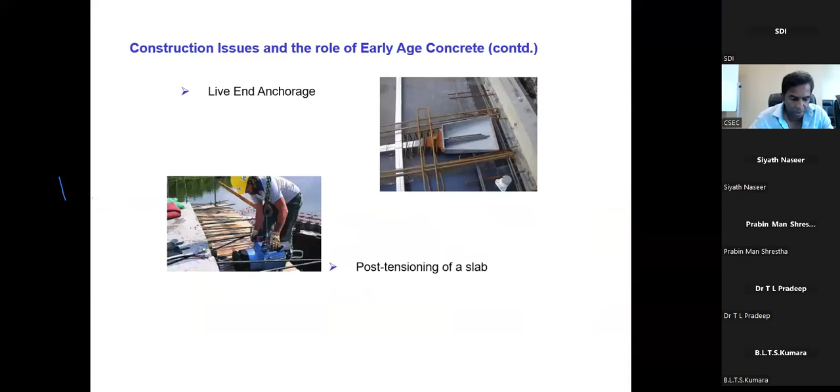Sorry, it automatically goes, but I want to spend a bit more time on those slides. So I'll just take over. Sorry. Let me correct it. Sorry about that. I think it should go backwards. Let's go to the top of the presentation. I'm sorry, it moved very quickly.

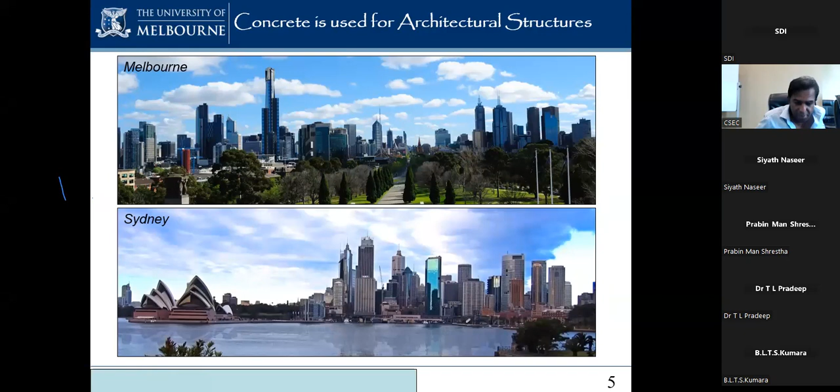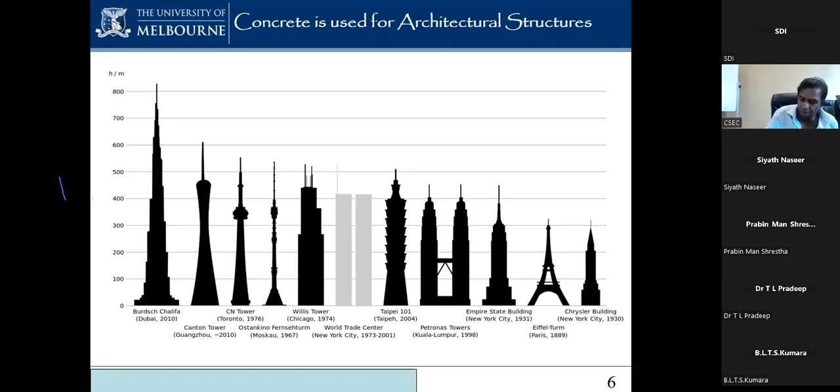My entry to concrete was high strength concrete in the Petronas Tower on the left hand side, still the tallest building in Malaysia, but it's been overtaken by the Merdeka, the PNB 118, which I had a chance to work on. This is when I was doing my PhD. Ken Day, I have a lot of respect for. I consider him the best concrete technologist ever in the world, on the practical side. He was like my mentor, and taught me a lot of practical concrete technology.

He passed away a few years back. He got me involved in the foundation; he was advising on the foundation of the Petronas Tower. And don't look at the time it was constructed, then you'll guess my age. But that's all right. So in terms of the foundation, up to 80 MPa concrete was used, and as a student I got involved in this.

But working with Ken Day, and then the next one, where I was a project engineer especially for the core structure of the Telecom corporate building, where high strength concrete was used first in Australia, and I think one of the first applications in the world. We are quite proud that I introduced that, and I got the award for outstanding contribution by the Concrete Institute for that work.

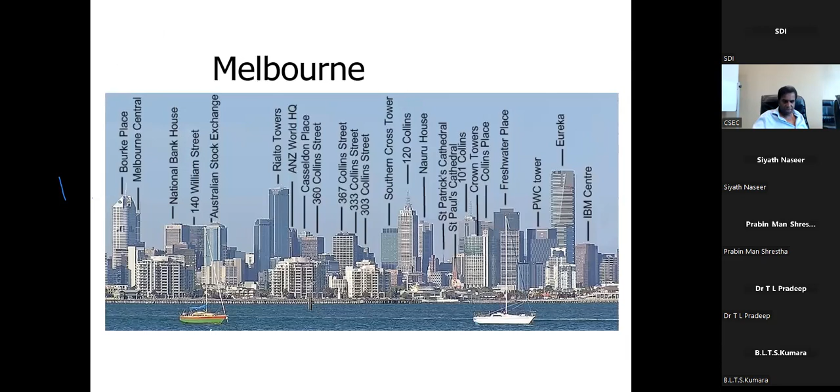So that's where my roots began in concrete applications in the field, which I continued in a number of places around the world. And with the Melbourne skyline, I already mentioned a number of structures I got involved in. These are some of the other works: the World Tower, where the core and columns were high strength concrete, and other places. What I want to say is concrete is not just for buildings; we need to think about the infrastructure as well.

So in this case, I want to just upfront say this one: the seawall in Sydney Airport, which I got involved in. In this one, the concrete strength was not the parameter. It was durability, which we call the RCPT value, rapid chloride penetration test value. From practicing engineers to academics, it's good to know some of those techniques. When you look at chloride penetration for durability, we look at the RCPT. That's coming into the drawings now.

In this one, the criterion was the Coulomb value. The RCPT value was 1000 coulombs. It's not the concrete strength, but concrete strength is also there. But the Coulomb value we had to satisfy, it was not easy to get that 1000 coulombs, because it's all about durability. So when it comes to sea walls, it's the durability. We look at foundations in buildings close to the sea. When we were working on the Lotus Tower, we had those concerns and addressed them at that time. Similarly, a number of other structures.

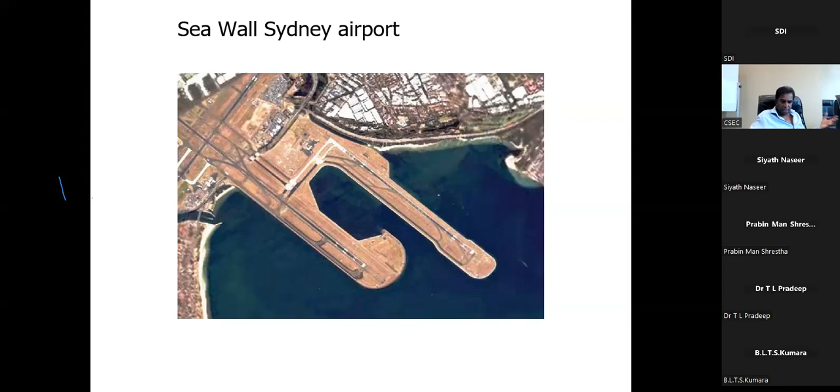Now, the Soul Tower: I recommended high strength concrete at that time because we wanted to reduce the axial shortening, that is, increase the elastic modulus of the concrete. We know the elastic modulus of concrete is directly proportional to the root of concrete strength. So always remember, if you have a problem with deflection and other things, why not increase the concrete strength to get the elastic modulus? As engineers and others in the construction industry, we have to think about these sorts of solutions.

And in this case, I was not involved, but I just put it here. Low shrinkage was the criterion for this bridge. So we need to think about what the performance requirements are. We are moving away from code-based methods. In the Australian concrete code committee, where I've been a member for about 25 to 30 years, we wrote the Australian concrete code, and we discussed even including some performance-based clauses to start with. This could be the first in the world in terms of concrete codes. So we are starting to think about it.

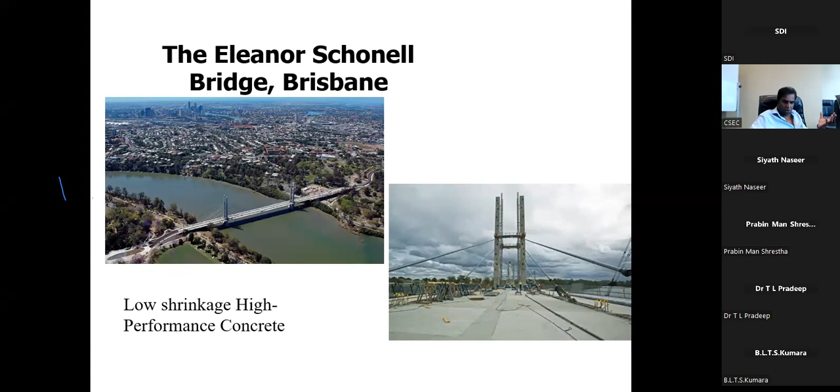So performance is the one: how these structures will perform. You don't read that in a code. So we need to think about improving the performance. In this case, low shrinkage was the criterion. It's not easy to get low shrinkage. I will talk about aggregate properties later on, and why you need to know all that. But low shrinkage is also very, very important.

Then the Burj Khalifa, where I will have some comments on pumping of concrete. As engineers and others, we need to know the problems with pumping. I'll give an example, a bit more on the Burj Khalifa. I was also asked to comment at the time when the Burj Khalifa had an issue with pumping. So I know a bit more than what is available on the web. So this is the Burj Khalifa. Again, I will not spend time on that.

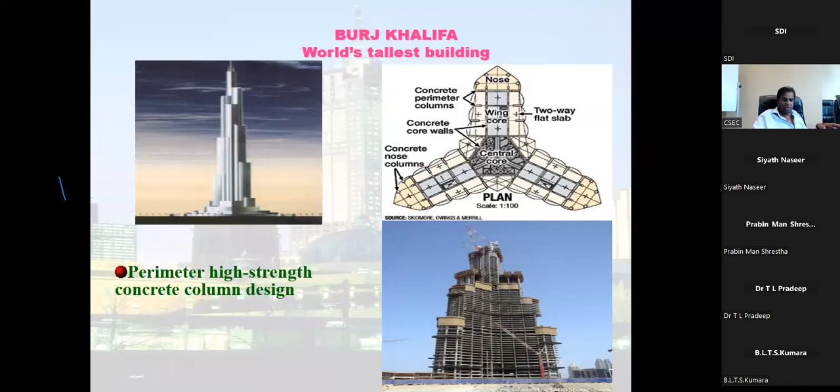I'm just finishing a 3-hour session today on tall buildings for another group. I will not go into detail on the tall building side, but this one is a critical one with the walls and all that. We can study these things, especially younger people studying the concepts. And I will have some slides on my work for the Burj Khalifa, and why that's important.

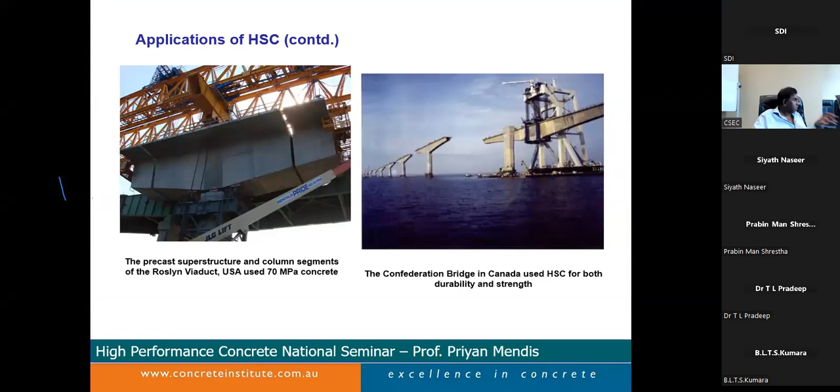And then the different ones where, again, for some of the bridges, high strength concrete, high performance concrete has been used. High performance concrete is every concrete we use these days. We should call it high performance because we are not just using normal concrete for the structural applications, especially. So we will just continue with that. And in this case, the high strength concrete was just used for the durability and the strength requirements, for nothing else.

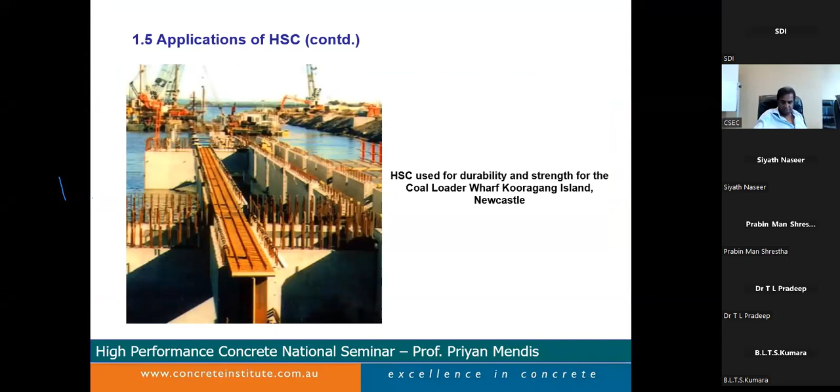Usually we have the concrete specifications separate from the construction drawings. But in this case, we are going to include more and more of the other specifications, like why we had to reduce the, any questions you have?

But please feel free to ask questions as well.

I haven't seen anything in the chat, but now with the elastic modulus or modulus of elasticity, when you increase that, and today I'm not going to talk about axial shortening, we can reduce the axial shortening. I always say concrete is a living material. Unlike other materials, concrete properties change all the time, because other materials, steel and all that, don't change much.

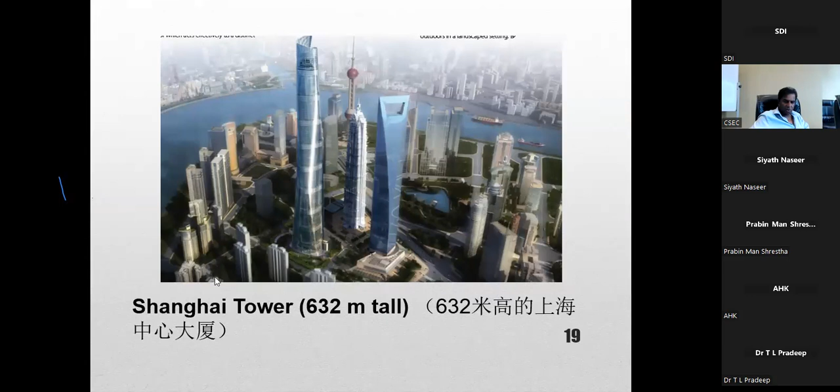These are very quick ones. The second tallest building, the Shanghai Tower, 632 meters tall. I had a chance to be really involved in some of the pumping, and also with Mr. Gong, who was my good friend. That's the Shanghai Tower. There, I think I got a picture of him. Yeah, that's Mr. Gong, who was the project director from the construction company. They are in Shanghai Construction.

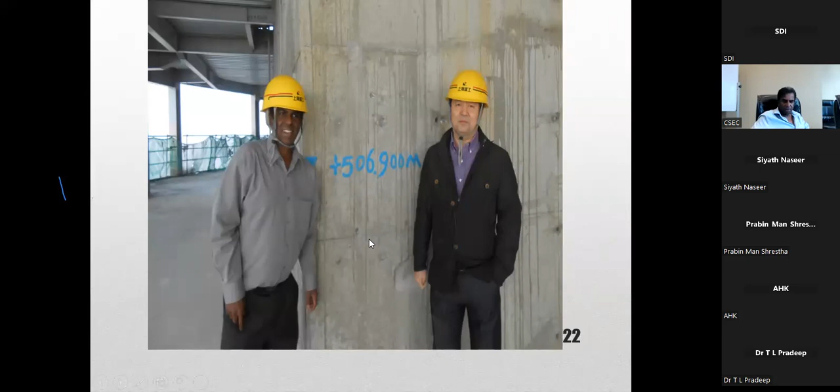This is the top of the concrete. I happened to be there that day. We were looking at the concrete, especially high strength concretes for this, and it's actually 507 meters. Overall it was 632. Anyway, I'll skip these double facades and all that. If you have any questions on the Shanghai Tower, I can explain to you. I lived there, and the Shanghai Financial Center is next to that.

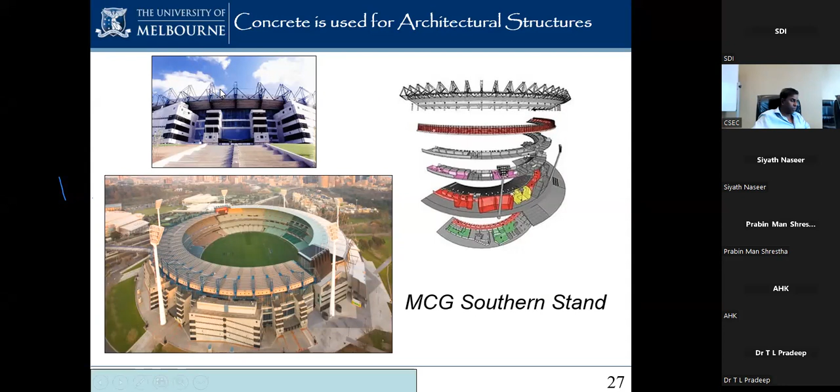Other applications where I was involved: one of the best cricket grounds in the world, the Melbourne Cricket Ground. I was working on the southern stand precast in the early stages of my career as an engineer. I worked on the precast of the MCG. I was analyzing the roof of this structure, which is really very interesting.

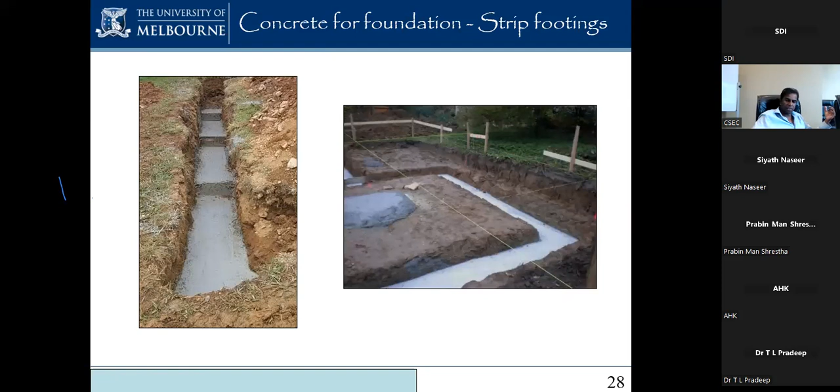And so concrete has many other applications. Even to start with some low-level applications like footings, concrete is there everywhere. So you need to know the performance requirement, what you require from the concrete, what you'd like the concrete to do. If it's a high-rise structure, it's different to a footing. Then very quickly, all these applications, concrete can be used for concrete roads, fences, and many other applications. So we need to think about all the different applications.

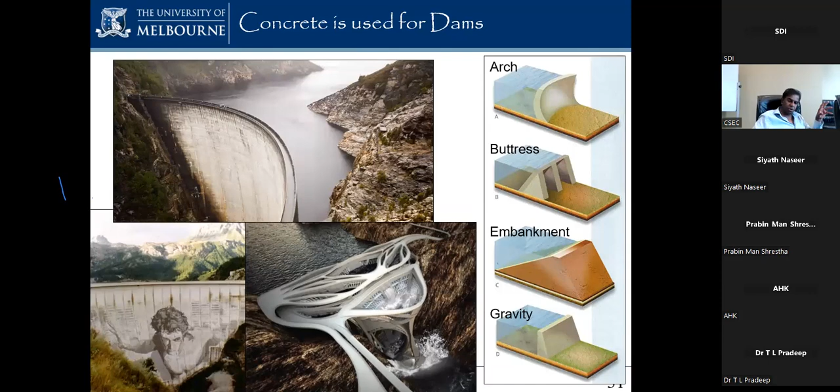Dams. Again, when I was studying, I had a chance to go and see the Victoria Dam here. It's really one of the best structures I know of. The arch dam, and I had a chance to spend about a week with the labs near the dam at that time as a student. Concrete dams are very, very important. I will not go into the detail. You should have a chance to go and have a look at this dam, if you've not seen it.

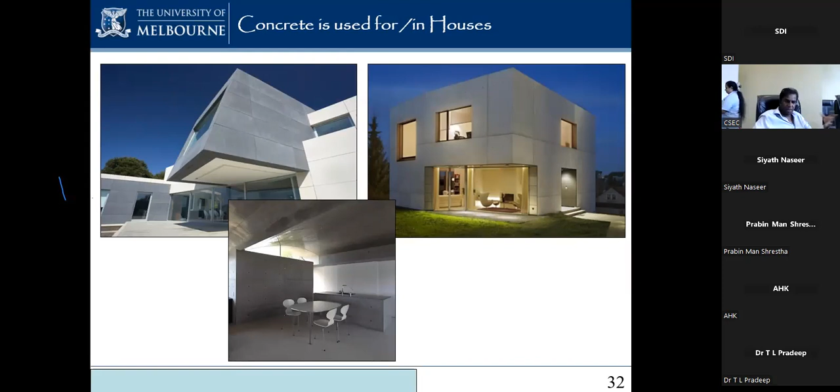But again, this is where I'm working a bit more now, on modular concretes, modular construction. Again, concrete can do things that other materials can't do with modular type structures, prefabricated. Today, I will not have time to touch on that. We'll leave it to another time.

I'll talk about one example later on of the work we are doing closer to here in Colombo, the material. So again, think about what are the main ingredients. It could be boring to go back, we already know some of that. The cement and water, as I said, sand, fine aggregates, crushed stone, coarse aggregates. We get the concrete. Just to emphasize what I said, the cement paste is like a glue, gluing the aggregates together, and then we have some chemical admixtures we put in to modify the properties.

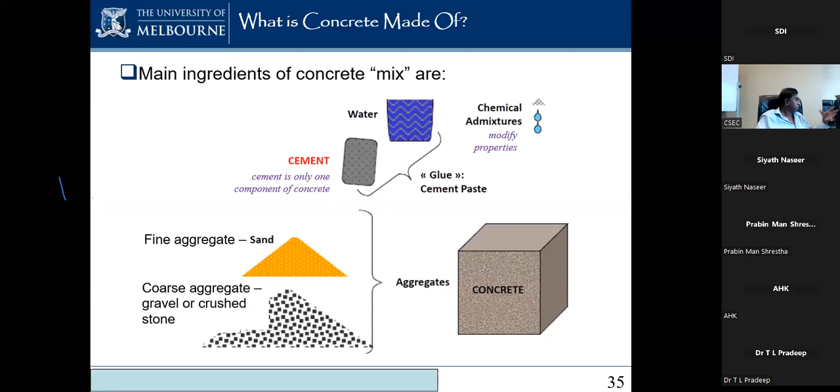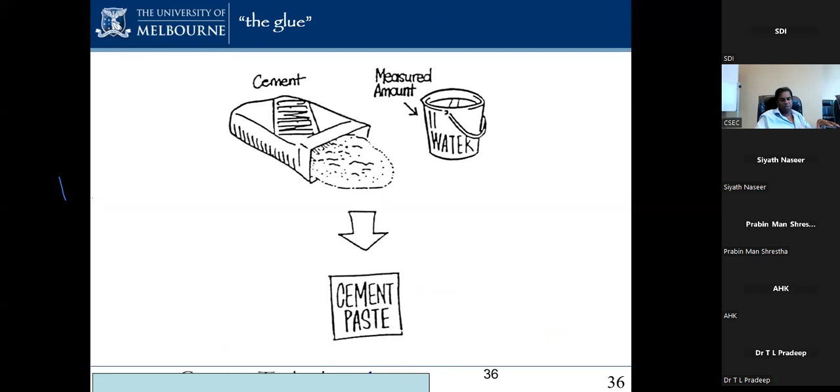And so with the cement, again going back to the basics: cement, and you have the water, and the cement paste. This is really to remind you, refreshing our memory of the cement.

I know we've got a meeting.

So the water to cement ratio, for 35 MPa, just assume about 20 liters of water. As we know, adding a bit more water, strength drops. That's why we shouldn't allow people to add water on site, right? Concrete strength drops. These are basics, but it's good to revisit some of the basics. The water cement ratio is a key one.

And rather than adding water, if you want workability of the concrete, you have to use superplasticizers. Admixtures, these new superplasticizers, will not change the strength. Then the coarse aggregates and fine aggregates. Fine aggregates go up to about 0.1 millimeters; we normally say in Australia 0.075, but 0.05 can be a fine aggregate as well. About 30 to 5 millimeters and up are coarse aggregates, going up to about 19 millimeters, 3/4 inches.

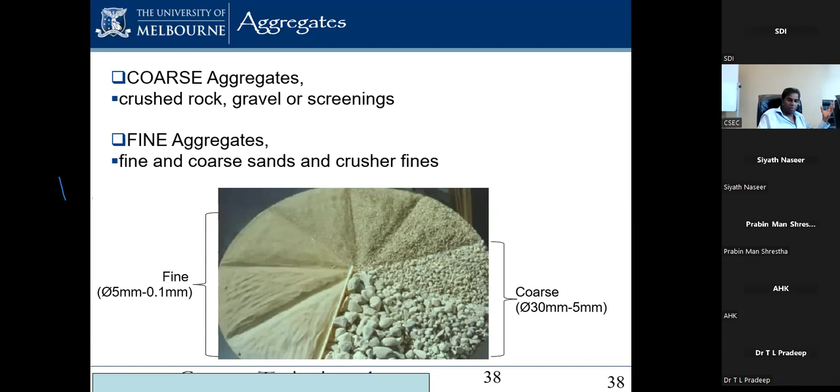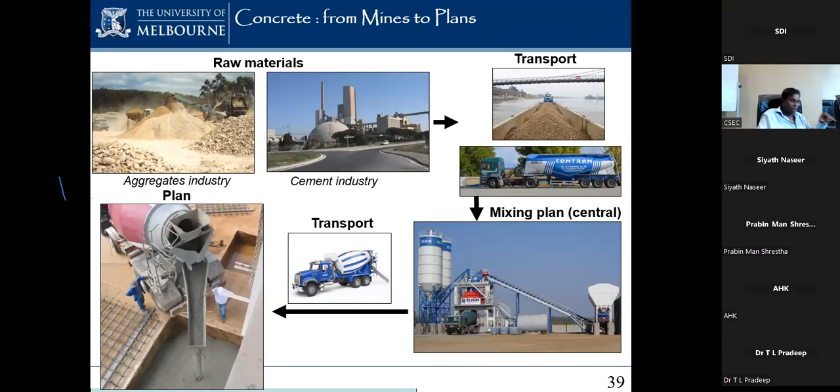So we can use that. Raw materials are readily available. I will talk a bit more about cement production later. Why I'm talking about all this today is because to get sustainable concrete, we have to understand the basics. Now, why is concrete that popular? It can be easily transported, placed, compacted, and finished. So going back to some knowledge that you have from the undergrad days.

The cement is about 7 to 14%. It can vary. It's good to know some of these numbers; even I forget some of these numbers sometimes, but because I teach, I remember. Aggregates are 60 to about 70% of the volume. Most of the concrete is aggregates, right? Water is a certain volume, in this case 14 to 22%. And the chemical admixtures as well.

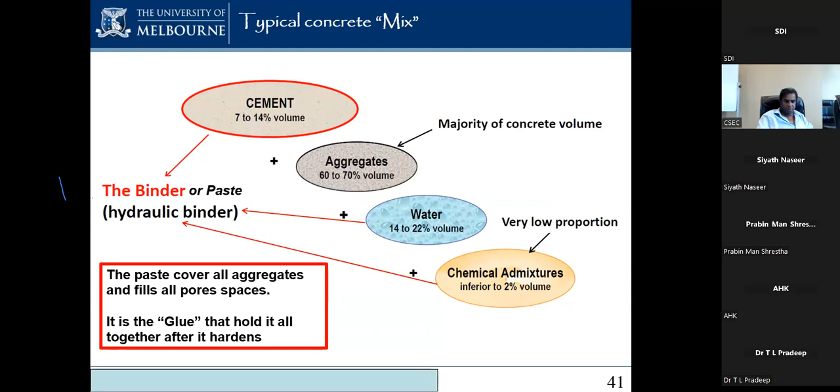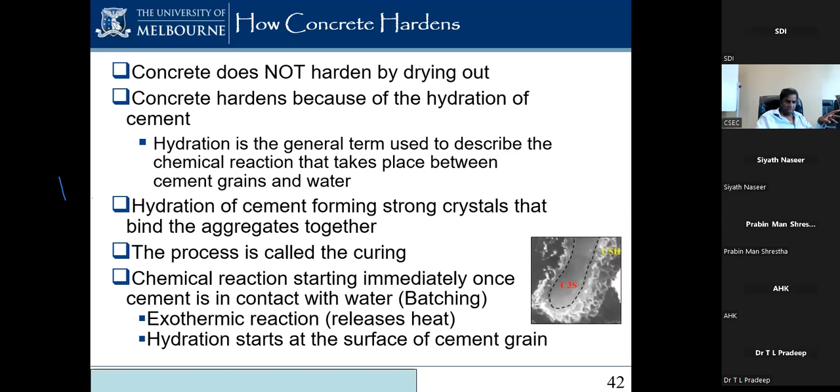So again, you have to remember, concrete does not harden by drying out. When I ask someone, we think the water escapes and dries out and you get concrete. It is not. It is the hydration of cement, and I will have some slides on what this hydration is.

Then come to the reinforced concrete. Take one example, a slab: if you apply the load, it's in tension, pulling apart the slab. Concrete has very high compressive strength, but it is very weak in tension. So we need to put in steel reinforcement; steel bars reinforce the concrete. So the best composite material in the world is concrete. Complicated, but if we improve the tensile strength, we can reduce the cement. So I'm working towards sustainability.

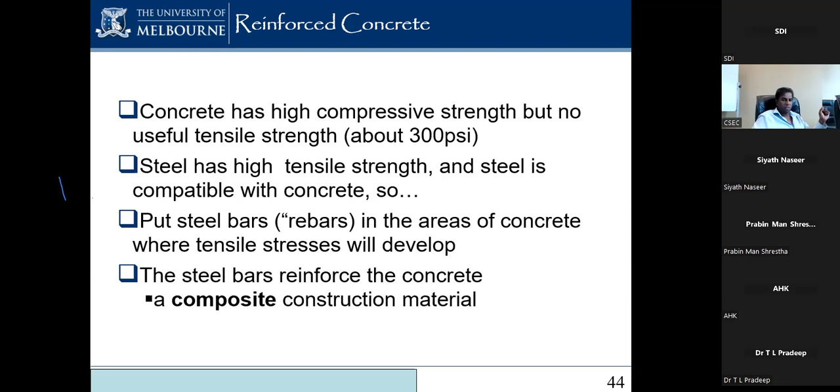Steel needs lots of energy to produce. Now they talk about green cement, green steel. With green steel, they use renewable energy or some waste materials to produce energy in the process and call it green steel. That is not green steel. What we should do is improve the properties of steel to make it greener, but it's not happening like that.

Wrong one, I think I'm pressing, that's what happened.

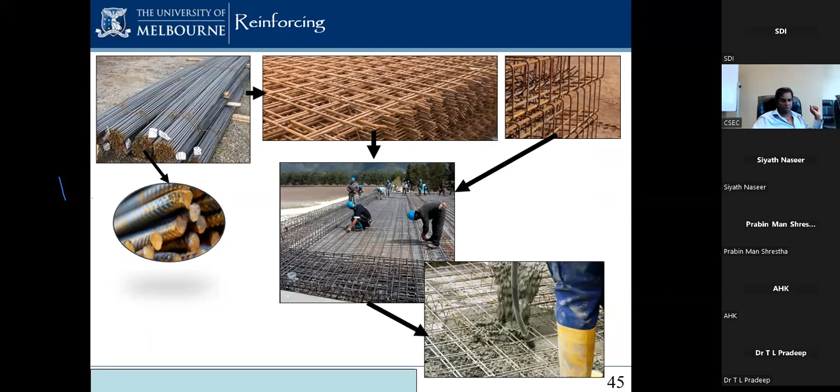In this case, for those who are new to these materials, steel reinforcement can come as bars or as mesh, for slabs especially, and walls sometimes, and reinforcement is used in beams and other elements. Today I will not explain reinforcement in detail. Those who know will see there are ribs on the reinforcement to improve the bond between the reinforcement and the concrete. Without the ribs, you may not get the full bond between the steel reinforcement and the concrete. I'll leave that to another time.

We can have all these complicated structures with lots of steel reinforcement. But the problem is, you want to make sure when you're on site that you can have enough concrete in between.

What happens is sometimes your reinforcing bars are too close to each other, so the concrete can't go in. The rule of thumb we normally use is that the distance between the centers of reinforcement should be more than 3 times the diameter, because the aggregates also have to pass through between the reinforcement. So you have to make some decisions. There are places where we put all this reinforcement but the concrete can't get in, so you have weaknesses there happening all the time.

Other thing we have done in the world, I may have time to talk about today, but not sure, we'll see depending on the time I spend. But there's self-compacting concrete, and we'll learn more.

Now, what we do on-site is get the concrete transported and do what's called a slump test on-site. The slump test is still the best test for workability. What we do is fill the concrete in a cone. You can just look up the slump test on the web, you'll get videos, slides, pictures and images for all that. Once you do the slump test, you can determine the workability of the concrete.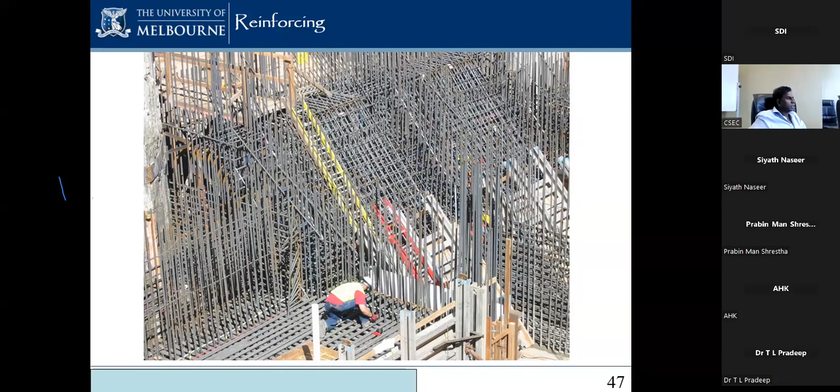We call it self-compacting concrete, meaning you don't need any vibrations. That's the trend now, and we use it a lot because we want to avoid vibrating the concrete to get proper compaction. Self-compacting means you have the full slump, as we call it. We put water and other admixtures to make it fully workable, fully flowing concrete. If you pour that, it will fully flow - that's called self-compacting concrete. It's very useful for applications like big, raft foundations, where you don't want to go in and vibrate, which is very messy. So we use self-compacting concrete, and you may have to refer to some of that later on.

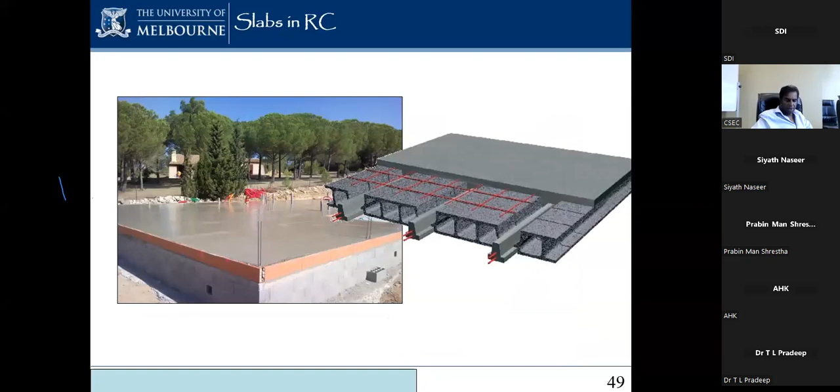So again, I'll skip this one. In reinforced concrete slabs, you have different types of slabs, you need to put the reinforcement in there to get the proper properties. Pipes are also really important to know - pipes are done by rotation methods, and again there are concrete applications there.

Today again I will just touch on some of these topics, but there are two ways of learning. You already know some of this, but I want you to start thinking about it and reading a bit more, the web and other books and all that.

So, corrosion of reinforced concrete - in normal concrete we also have to understand we have a high pH value, about 12. What this does is create a passive layer, when it's alkaline, around the steel reinforcement, that will prevent unwanted materials getting into the steel reinforcement quickly.

So what happens when you have corrosion? Chlorides and sulfates spray in, and that will really reduce the pH value. Carbon dioxide, along with chlorides, creates an acidic environment - chlorides will make hydrochloric acid, HCl, and really reduce that pH. That will damage the passive layer and aggravate the corrosion of the reinforcement.

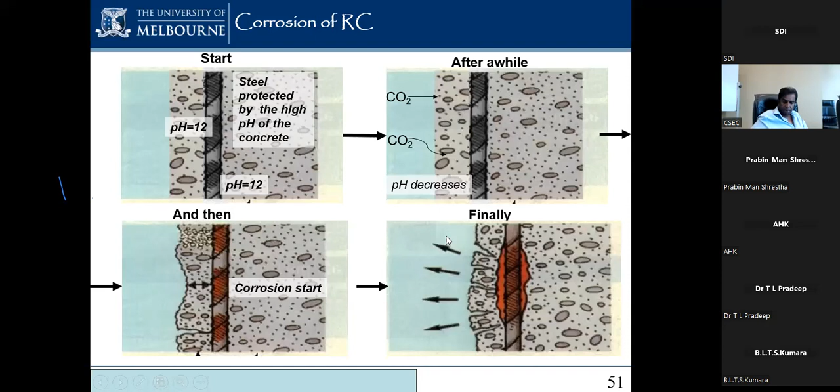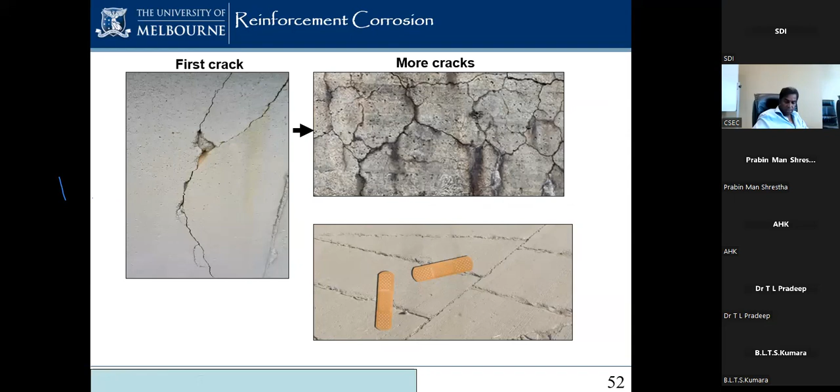So it's good to know a bit more of the basics - once corrosion starts, and even carbon dioxide or other factors decrease the pH. We're also doing work on carbon absorption, but this carbon dioxide may cause problems in increasing corrosion. So we get corrosion, and the rust expands around the reinforcement and can dislodge it. You'll see the first cracks form, then more cracks form. I'm sure you'll be asked to comment on what sort of cracks are on site, so you need to understand this - if there are any questions, I'm happy to answer them. These problems happen especially close to the sea, but other places can have them too.

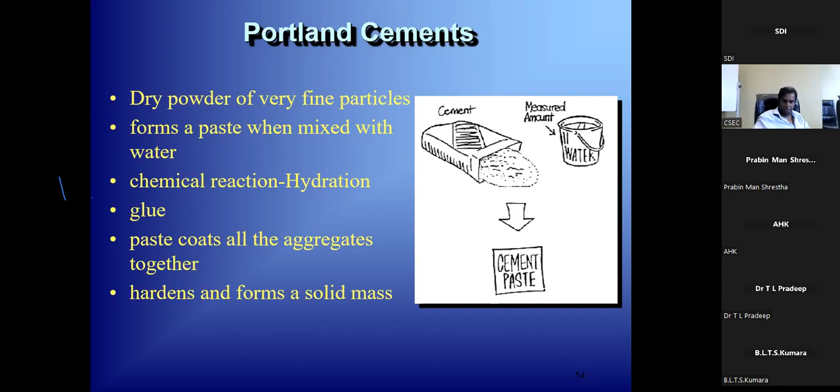So those are the basics, very quickly, and then we move on to some other material. But we already talked about this - you have cement, you have water, mix the water properly, and get the cement paste. So what is Portland cement?

It's good to know why this is happening rather than just saying we have cement and moving on. I've done this too when I was studying - I just memorized these things but didn't realize the importance of going deeper and understanding. We can go and buy cement, and sometimes we think, why bother looking at it? But to improve the properties of cement and concrete, you really need to understand what it is.

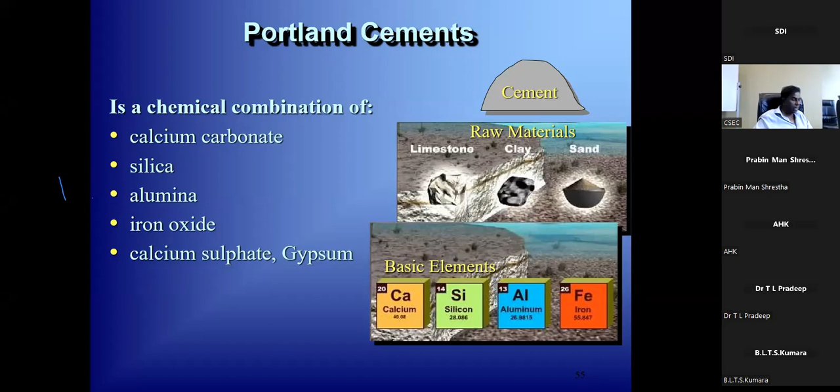Portland cement is a combination of calcium carbonates, silica, alumina, iron oxide, and some calcium sulfates, which is called gypsum. In the manufacture of Portland cement, you can even read from the web these days - not all the information, but you can see some of the processes. I just want to give a summary here.

The selected raw materials - limestone, chalk, clay - are mixed, crushed, milled, and proportioned. So it's in a kiln.

We're getting to - I don't know why I had the conversion - to centigrade, why I put Fahrenheit. 2,600 to 3,000 Fahrenheit. Anyone can quickly convert. We'll do that later, I think I still remember. Do you remember the conversion? C over 5 equals F minus 32 divided by 9, right? That's correct. Anyway, we can convert easily from Fahrenheit to centigrade values as well.

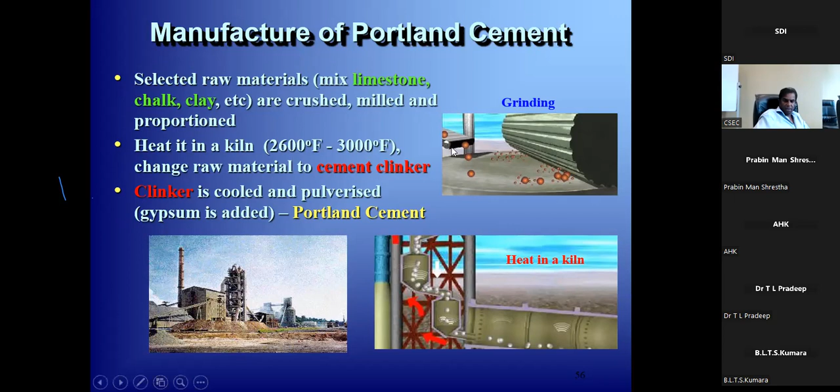So the clinker, once it's heated in a kiln, you get what's called cement clinker. The cement clinker is cooled and pulverized, and that's where gypsum is added. That's called Portland cement - so it's not that difficult to get Portland cement. That is the process: get the raw materials from the quarry, go through this process where the kiln is, add some gypsum and other things in smaller quantities, and then you get the cement mix which is transported.

So let's look at the why - why cement is the polluter. You need to understand why we want to reduce cement, to reduce the carbon dioxide, to get sustainable low carbon concrete. That is the basic thing - reducing cement and going for other materials, recycled materials, which I'll talk about. But the basic thing is to reduce the cement quantity. Anyone can say cement is a polluter, but why does it have such a huge carbon dioxide issue?

I'll give the answer, which you can read more about. The calcium carbonates are put in these kilns to make cement. Calcium carbonate, which is limestone, we get for cement production as a natural material. Limestone is converted into calcium oxide, so obviously carbon dioxide escapes from that process. That carbon dioxide going into the atmosphere - that is the pollution.

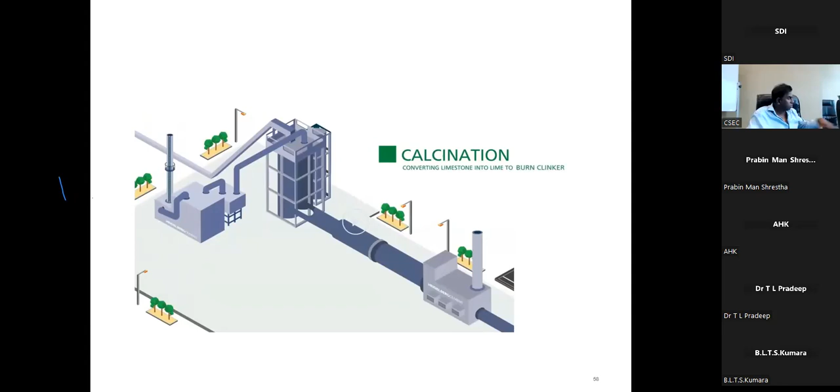These are some of the technologies. Calcination is one - I won't have time to really cover it today, maybe another time. But converting limestone into lime to burn the clinker, we store that carbon dioxide and reuse it. Another one is called oxyfuel technology, you can read about that. These are all trialing out to really arrest that carbon dioxide, reuse the carbon dioxide even.

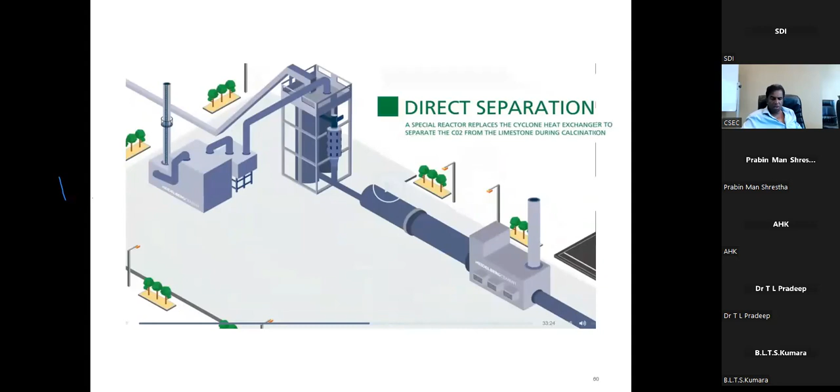Direct separation - we can separate the carbon dioxide. Once it's separated, we have to make use of it. So here, this is the work that we have started doing.

There are two things we are doing. I won't have time to talk too much about this today, but we have to start thinking about what is called recycled concrete aggregates. I'm working towards a low carbon concrete. When you demolish concrete, we used to just throw it into landfill, or use it for low grade applications like road bases. But now we can't afford to do that - every concrete being demolished, we must reuse it. So what we do is crush it and reuse as aggregates.

But there's a problem there. We have to understand why this problem comes up - I have separate lectures on recycled concrete aggregates - but the recycled concrete aggregates have two phases: one is the aggregate touching the old cement paste, one interface; the other interface is the new interface with the new cement paste. So there are two interfaces. Because of that, there's a weakness in that interfacial transition zone, the ITZ, which is the weak zone where failure of the concrete occurs.

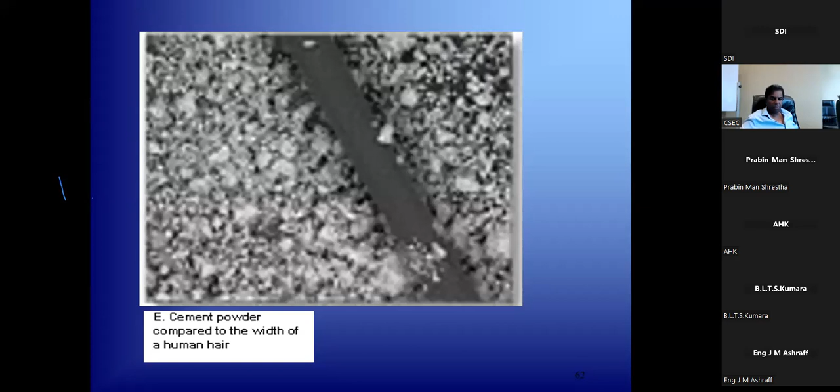Now, see the cement - it's very small particles, smaller than human hair. So these are the principal cements we use in Australia. In Sri Lanka, different countries use different names. Here we only have blended cements and normal Portland cement, but elsewhere we have low heat cement to high early strength cement. Here we can specially order it, but in Colombo...

In other places, what I'm used to in Australia is different types of cement - sulfate-resisting cement for marine environments offshore, selecting the type of cement. But all cements these days are blended cement. Portland cement is mixed with about 30% fly ash or so - all cements used in Australia are like that. So we are going towards more blended cements.

I'll leave it to another time to talk a bit more, but maybe that's useful information. We are allowed about 7.5% of mineral admixtures while still calling it Portland cement. So we can use about 7.5% of other materials and use the name Portland cement, but not more than that. Some countries allow more than that, but then we have to go to what's called the blended cement category if we go beyond 7.5%.

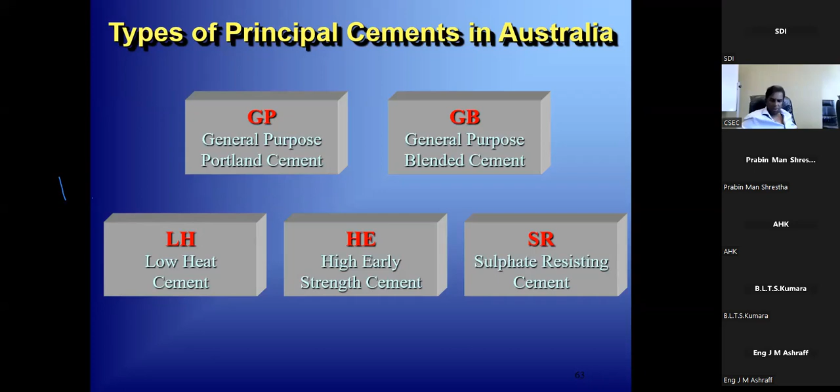Again, these are some of the basics you can read from the web and other books. General purpose cement is used. Blended cement is very popular now. High early strength cement: there are a number of applications when you want to remove the formwork quickly and get the strengths quickly.

The other one is low heat cement: if you want to produce low heat, you have the low heat cement. Sulfate resisting cement is used where there are groundwaters, close to the sea and all that. Cement constituents: I'm not saying that you should remember all that. Go back to basics. Try to remember how cement is made. Then we can attack that and make the cement much more low carbon and user friendly.

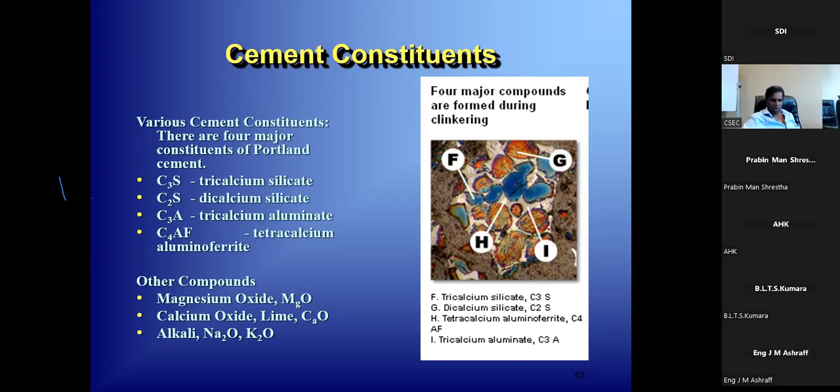C3S, the tricalcium silicate. It's the early stage in the world for these things. We don't yet try to manipulate these to make it low carbon. These are things some of us are working on. Then dicalcium silicate, tricalcium aluminate, C3A. So these are the main components of the cement. There are a few other smaller level compounds. You can look at that information. So I will not go into detail.

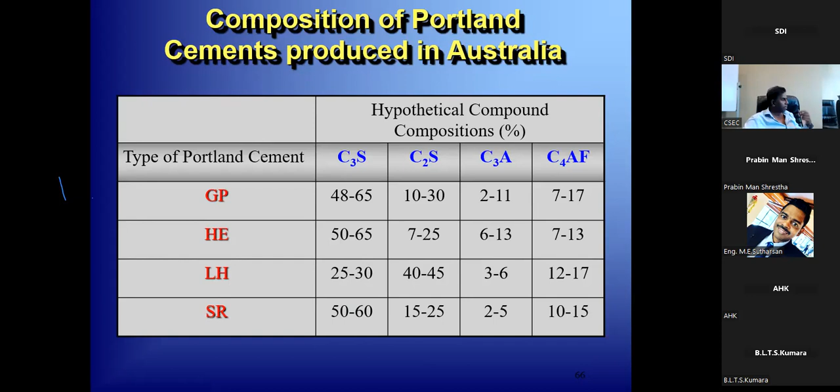If it's high early strength, what we can do is reduce the C2S component slightly. And again, for low heat, we can reduce the C3S component. So we should know how to attack that, how to make it really happen. And to make it sulfate resistant, we reduce the C3A component a bit. So we could really manipulate the ingredients. You will see all that in the future, not yet done properly.

Going back to the basics, don't read from this one too much, but just try to remember: as I said, cement hardening is not escape of water. It is the chemical reactions, what's called cement hydration. C3S in the cement reacts with water and gives C3S2H3, CSH, and calcium hydroxide. C2S again with water gives CSH and again calcium hydroxide. Calcium hydroxide is the material generated from that cement hydration reaction.

Now, I will not go into detail today, but you have heard about some admixtures, right? Pozzolanic admixtures. We use fly ashes; it has really become basic. As I said, 30% fly ash is in every cement in Australia. Here we've got blended cements. Fly ash has silicon oxide, SiO2. SiO2 will react with the calcium hydroxide and form more CSH. That is all it's doing. That's why they are called pozzolanic admixtures. They join the chemical reaction.

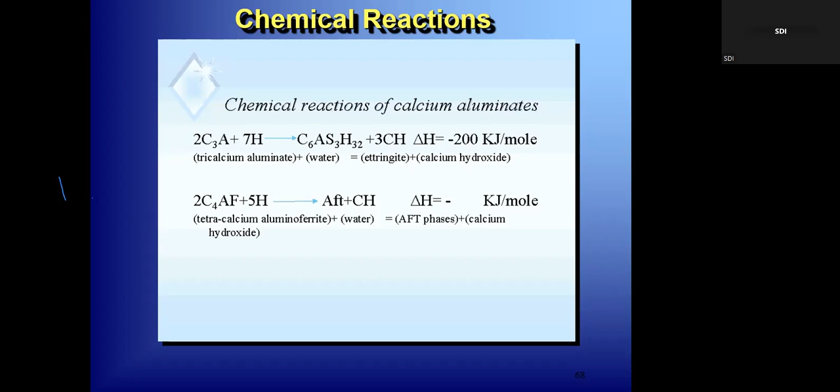I will not spend time on it today, but this ettringite formation doesn't help the concrete. That comes from the C3A. So you can reduce some of your C3A if you want to make it a bit more durable and if you think there's an ettringite issue. So like that, you can know the basics and attack them to adjust the cement properties. Again, I'll skip that one, but these reactions could happen.

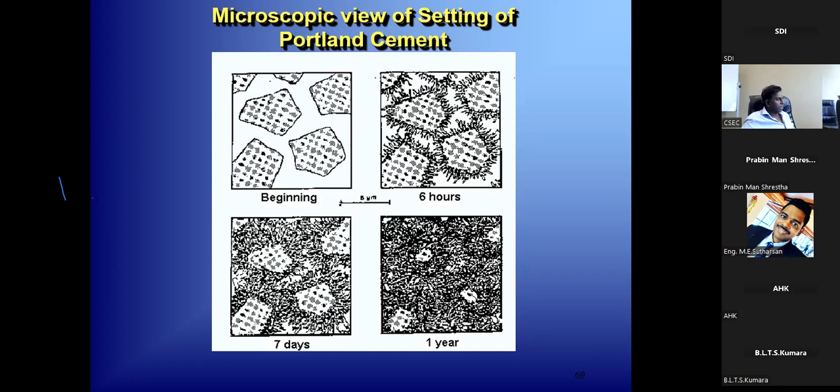The only thing I want to say is about the cement reaction. The hydration reaction happens with time. We sometimes forget that curing means you provide enough water for the cement hydration to continue. We don't realize it can happen up to 1 year, or even later on. So that's why initial curing is quite important, putting water and other methods of curing, for the hydration reaction to happen. So think about curing as a key to getting good concrete.

Now, again, I will not have time today to talk about what's happening. In specifications, we need to limit that heat generated to about 70 degrees. There are two things we do. The heat generated when concrete is mixed, the increase in temperature due to the hydration reaction, we keep to about 70 degrees. The other thing we do is try to make the difference between the middle of the concrete and the outside surface less than 20 degrees. We do that, and so those two things are good to satisfy.

Different places try to do that, but this is what I've been following forever. And I had even PhD students working on this area. So that is there to reduce the cracking, because excess heat will generate some smaller cracks within the concrete. So to avoid that, we reduce it to 70 degrees.

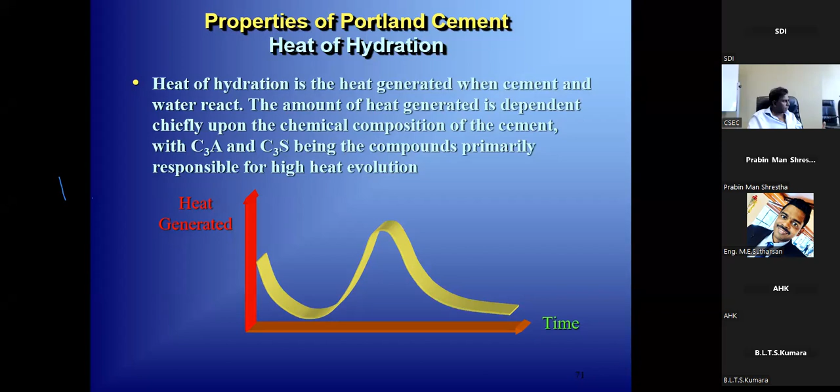So if you want to adjust, I mentioned we can adjust the constituents, components, play with the C3A and C3S. So it depends on the C3A component and C3S component. I showed you a table before how you adjust the C3A and C3S. So yeah, these are more for cement manufacturers, but we have to give the input sometimes.

Effect of admixtures. I mentioned you can sometimes use some chemicals, we call them retarders, some chemical admixtures to really reduce that heat of hydration. Delay the reaction. So fly ash and slags and all that automatically reduce the reaction. So that's the heat on the y-axis, time on the x-axis. So there are some chemical admixtures that can be used to retard that.

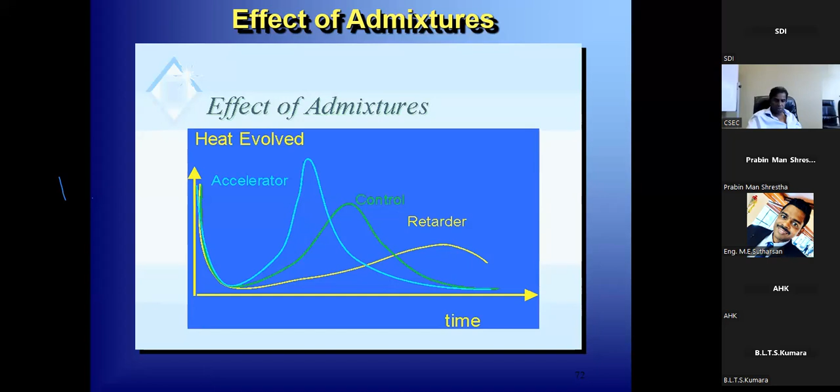If you're designing a structure where occupants only come after 1 year, you can smartly use the elastic modulus; the strength increases by about 15%. I normally use about a 15% increase. Now I'm getting towards low carbon concrete, where we need to be smarter, using these newer things, not just throwing in some materials and making it low carbon, but trying to optimize the structure as well. So optimize the structure, use some high strength, high performance concrete, as well as some smarter techniques, because we have to understand it'll be occupied only after, let's say, 1 year. Use a bit of higher strength, but you need to get approval from the clients and the certifiers. So that's why you need enough knowledge for that.

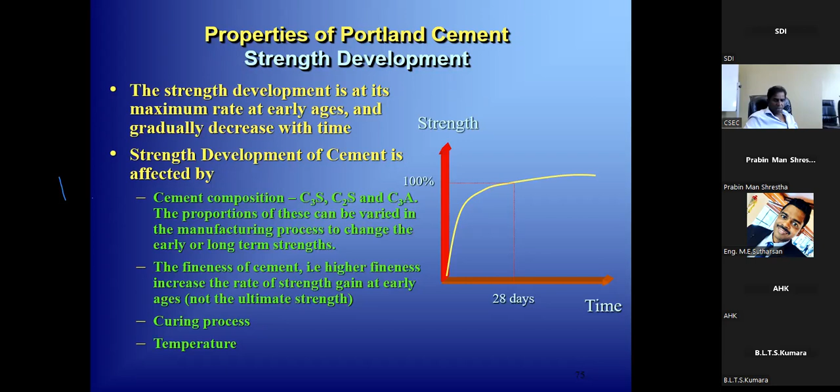So that's where curing is quite important. Strength on the y-axis, time on the x-axis. If you moist cure, put enough water all the time, you get the top curve, the highest strength development. It all depends on how you cure the concrete. And curing concrete, I can talk for hours, but the basic thing is to provide enough water for the hydration reaction to continue. So different methods.

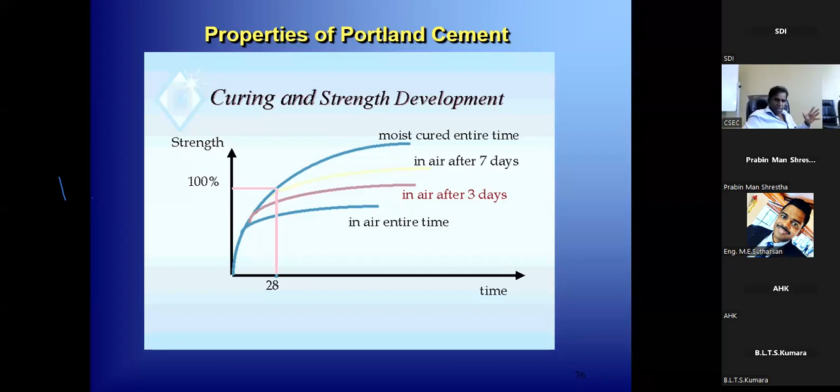Try to reduce the escape of water. You can even use curing compounds so that you trap the water inside and provide enough water within the concrete for the reaction to continue. That's what we are doing. Sometimes we put polythene sheets on top to prevent the water escaping. Sometimes we do water ponding. So curing is quite important. Just remember that by doing these things, we can get good concrete, and that helps get low carbon as well.

So volume change can happen with the cement. I'll skip that.

Permeability is quite important to get durable concrete. I will not have too much time today to talk about it. The permeability in the concrete, once you mention filler effects, all that will reduce the permeability of the concrete. That means compact concrete is more durable, so that unwanted materials, chlorides, carbon dioxide, all that will take more time to attack the reinforcement. So low permeable concrete is a key.

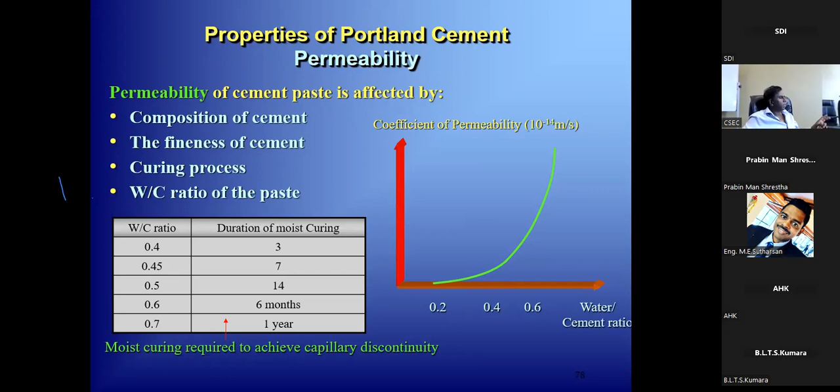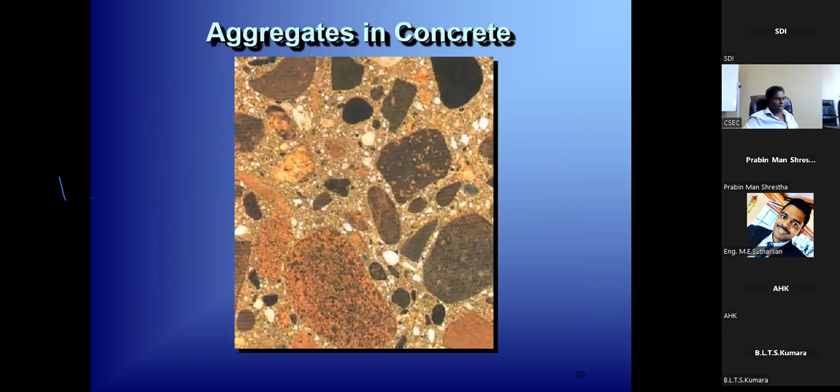Aggregates. I may have to skip the aggregates without saying too much. Good aggregates are essential, but I'll skip that, but I want to just mention this. The aggregate size distribution is a key. Again, the filler effect type of thing. You have to have a grading of the aggregates. The grading is the key. Different types of aggregate sizes.

Okay, I'm going back to a good question in the chat. In pile caps, what are the best methodologies to mitigate the heat issues? I think even for pile caps, similar methods can be used. Try and use a bit more fly ash, as long as you get the strength requirements properly. Slag is another material. These days we are even using what's called triple blends: silica fume, slag, and fly ash.

With what's happening in the world, we'll have some issues. It's already happening. Fly ash costs are going up. People want to make low carbon concrete, reduce the cement, and throw in a bit more fly ash and slag. We are using slag up to 65% now. But we are going to run out of slag, and slags are getting expensive. That's why we have to have some new material. So the answer to this question on pile caps: similar methods can be used to reduce the cement content a bit more and use some fly ash.

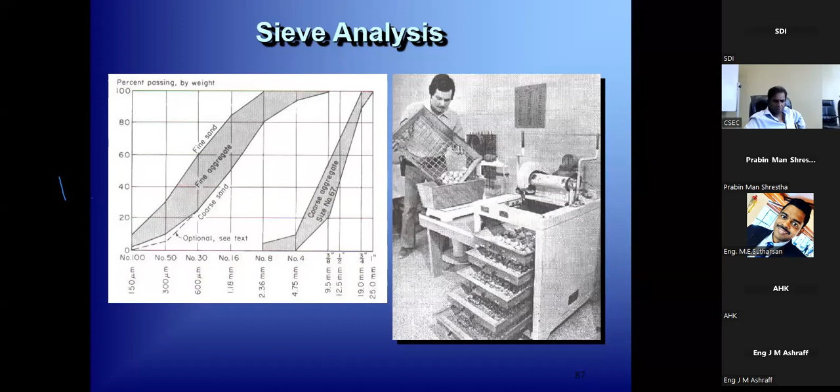Aggregate grading and durability of aggregates are quite important. The abrasion resistance means the breaking strength has to be very strong, and chemically the aggregates should be without any reactions.

We are using glass, trying to use waste glass now. Waste glass has more silicon oxide, SiO2. Some aggregates are more reactive, containing unwanted alkalis, and these react with the silica present, even without glass, since glass adds even more silica as a material. So the silica reacts with the alkalis causing a major problem called alkali-silica reaction, especially in bridges. This is called ASR - look for that term. There are problems with ASR.

Our problem is when you use glass as a replacement of aggregates to make concrete more carbon friendly, what happens is you need to prevent ASR.

We have some solutions. We have to thank Professor Mike Thomas, who is well known to me, who found that fly ash, up to about 30-40%, will reduce the alkali-silica reaction, and slag a bit as well. Continuing from your question on durability, fly ash and ASR is another aspect.

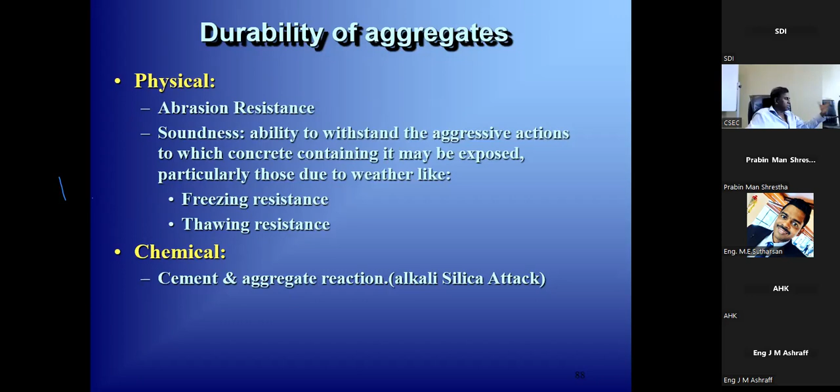We have done this work - we put waste glass replacing the normal aggregates. It's reactive, of course, because of SiO2. We throw in about 40% fly ash, and the ASR problem goes away. So we have solutions. We can't just ask the concrete technologists or cement manufacturers to provide these solutions - we have to give those solutions.

Production of high-strength concrete - aggregates are important there too. I'll go through this quickly in the next 20 minutes. For producing high-strength concrete, selecting suitable aggregates and the type of aggregates matters.

This was PhD work from Dr. Kasun Chanaka, still a senior research fellow who works with me, and has done some very good work - his PhD from here. He's working in CSIRO as well these days, but he also did this work with Holcim Australia. We found different types of aggregates matter.

High strength concrete is made by making the paste very strong - using fly ash, silica fume and other materials, along with admixtures, to make the paste better. Then the weakness is not the aggregate-cement paste interface. As I mentioned before, normally failure starts there, but in high strength concrete, it breaks through the aggregates instead. Because of that, we need to do other things.

When you're doing shear designs, we rely on what's called aggregate interlock - the interlocking of the aggregates. So aggregate interlock actions are reduced in high strength concrete because it breaks through the aggregates. It's good to know why these things are happening.

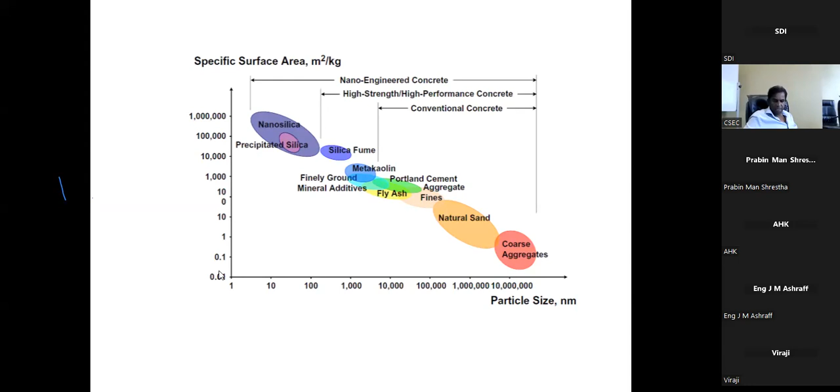Going back to this point, where we are heading now is nano-engineered concrete, and graphene is a good example—nano material, water soluble. That's why I said carbon nanotubes were never going to be good; I said this fifteen years back. I had a student doing six months of a PhD and I converted her to do other things, because I thought nanotubes weren't going to be popular in the future. We didn't work on them—we did graphene instead, but graphene was too expensive at that time. Now it's become cheaper, especially with a company called CGT doing the production.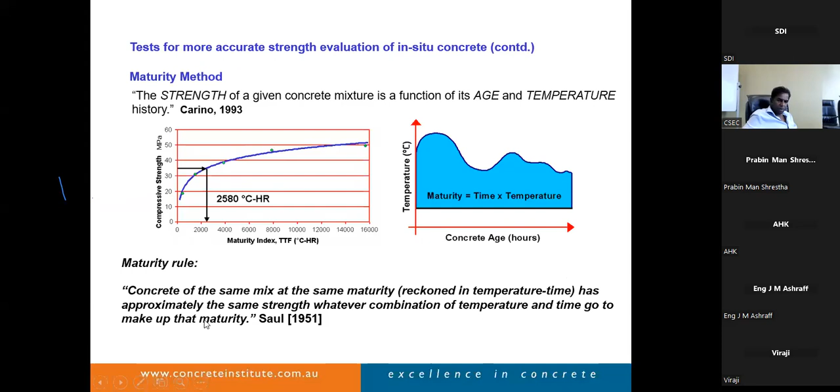Let's move a bit more quickly. I think I skipped the early age section—I talked about temperature development and methods to reduce the heat of hydration, and I mentioned pumping.

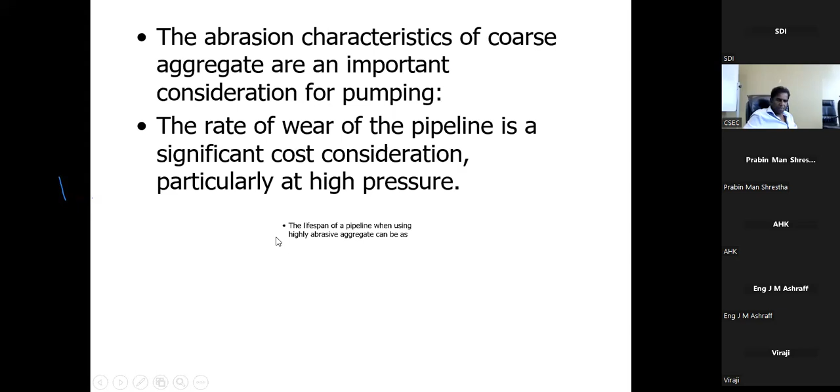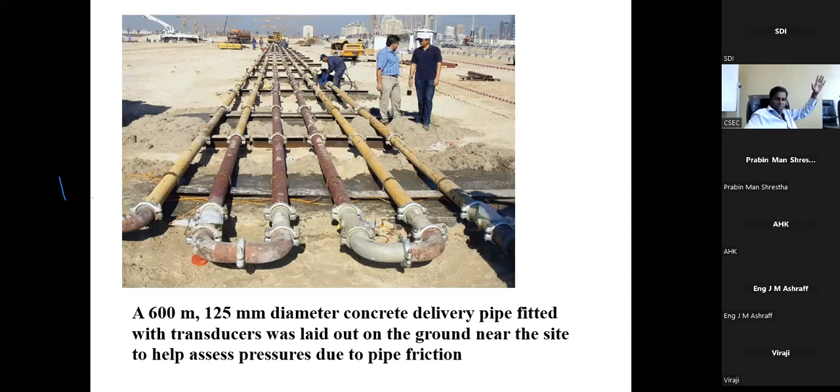There are a couple of slides to show a problem I got a little involved in as part of an advisory team—this is the Burj Khalifa, where concrete was delivered through huge pipes. We know concrete pumping for normal-size buildings, but this is a tall building that had to be pumped 500-odd meters to the top. There were a number of pumping issues, and these are the pumps used to solve it.

Halfway up, they found the pressure wouldn't allow them to pump the concrete to the top. The solution was easy: reduce the aggregate size—not just me, a number of people agreed—from 20 millimeters down to 14 millimeters, and that resolved the pumping problem. So if you have pumping issues on site, try using smaller aggregate sizes; this kind of extra knowledge can be useful. For the Shanghai Tower, learning from the Burj Khalifa, even lower aggregate sizes were used—down to 10 millimeters.

Now, about low carbon concrete, since we talked about glass in concrete—we were the first in the world to use glass in concrete in an infrastructure project, the Metro Tunnel in Melbourne, one of the largest projects in Australia.

Our group, I have to thank Dr. Massoud Sofi, who was one of my former students, he was leading that work to put the glass into that project.

And the problem working with Holcim there was the glass was hitting the pumps. So these things you will never read on the web.

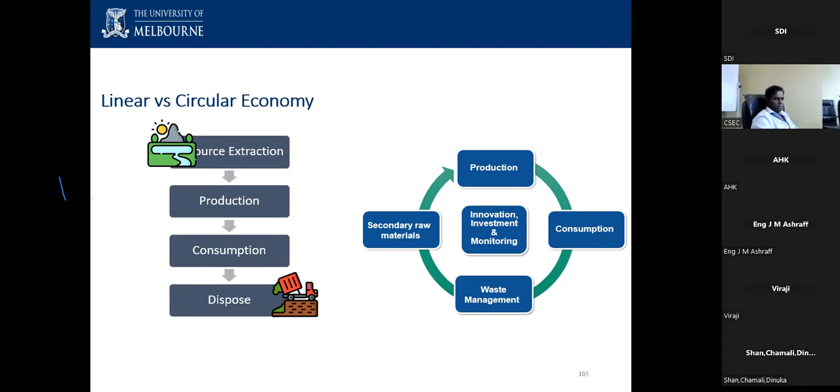It's a good point mentioned in the chat, that even waste glass, you can convert into glass again. Plastics we are converting into plastics, plastic oil to make plastics again. But these are not only energy intensive, there are other issues, they're expensive as well. So dumping into concrete is a good solution as well - I shouldn't use the word dumping, that's all. But let's keep some of that for the slides.

But we will have some new materials, net zero cements. We'll be writing some articles, you will see some of these methods. We are trying to use a material called olivine, that comes from igneous rocks, natural. Using olivine, we think we can make net zero cement, with carbon dioxide absorbed in the cement. So you'll see a bit more of that in the future.

And with some of these newer materials we have to start thinking - if we had mentioned to the cement manufacturers and all that about net zero cement, they would say who cares, we don't have time, we don't have.

When I was trying to introduce recycled concrete aggregates in Australia, I had a student, Dr. Moiri, he was leading some work in Holcim here as well. She was originally chemical engineering, then she did accounting as well, became a chartered accountant, but she did a study on the economics, the technical side, all of that.

She found that we did the work on recycled concrete aggregates. When we talked to the concrete manufacturers 10 years back, they said we can't afford to have an extra bin for the recycled concrete aggregates. Now when we go and talk, they say we can have 2 bins if you want to. So this is how the world has changed.

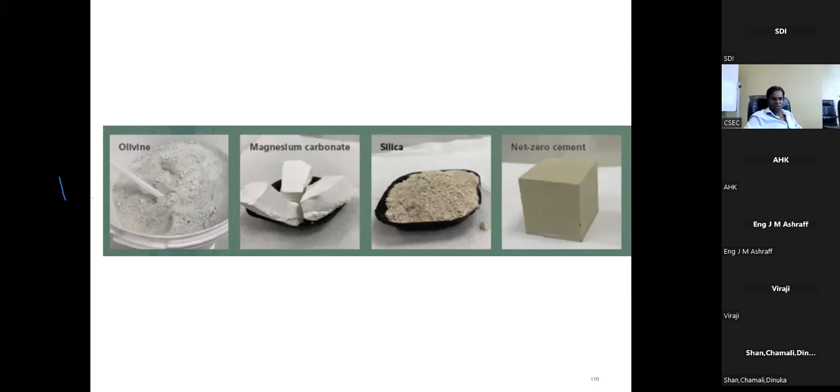But coming back to this, the low carbon concretes, you will see a bit more. Number one, Bligh Street, you can read the 6-star ratings. 20% of all the aggregates are recycled. 40% of the cement is replaced by admixtures. We talk about fly ashes, slags, and so on.

Green ratings are coming. I'm still proud to have started the Green Building Council of Sri Lanka in 2009. Mr. Shumalas helped me at that time. The green ratings are there. We have the system here developed by the council. So these ratings are quite important. And in this case, Sydney, we have what's called Green Star ratings in Australia. 90% of the steel has a recycled steel content greater than 50%. So the steel is being reused, that component.

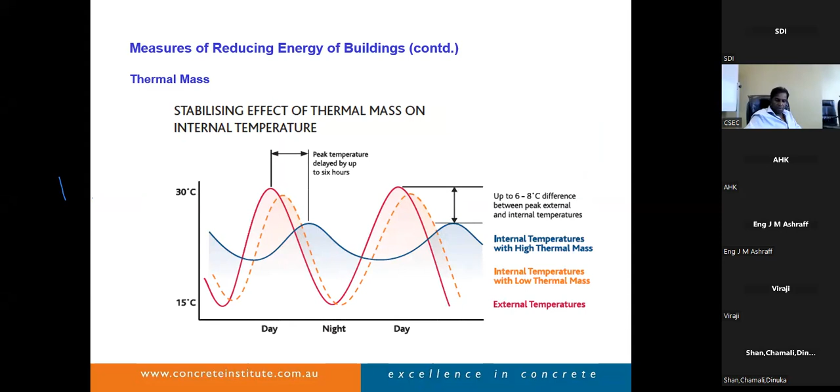Concrete also has an advantage, what's called thermal mass. The temperature is on the y-axis. Concrete has a stabilizing effect on the temperature differences, especially for cold countries. If you go to the Middle East, night is very cold, during the day very hot, and similar in some other countries. You can reduce the temperature variation by using the thermal mass of the concrete. That's something maybe you can incorporate in your work. I talked about the metakaolin clays.

Last few slides, applications of recycled materials. There are drivers, the policies are changing, now the governments are putting in all these policies. Australia has to reduce carbon emissions by 43% by 2030, net zero by 2050. Only 2 countries don't have much of a policy, America and China. I think China, of course, encourages that, but they don't have the targets. But targets are quite important, so I'm sure they will follow the other countries. Europe is where I'm coming from. I'm proud that I was asked to give the keynote on sustainability in Europe this time. They do a lot, but they want to learn from other countries as well.

The end of life considerations, we need to talk about the end of life. We need to think about these materials. We can use waste materials in concrete, but we need to think about what is happening at the end of the life. And we talk about carbon credits. If you're interested, carbon will become a business in the future. Carbon has a value. Today I will not have time to talk about that too much; when I come in December, and also in other seminars and YouTube talks of mine, I talk about Australia's carbon credit units.

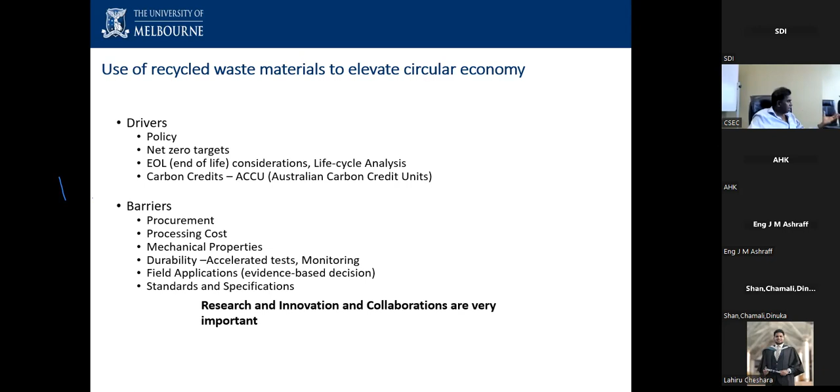But barriers: we can't procure the materials. We were talking about really cleaning the materials. There's a processing cost. We don't know the properties of everything yet. We don't know the durability. The evidence base has to be generated. All of us have to support that; I don't think just the contractors can do that. Standards and specifications have to do that. I'm leading a team in Australia, the Standards Concrete Code Committee, introducing some of these waste materials. What are the implications for the code? I think that's one of the first committees like that in the world.

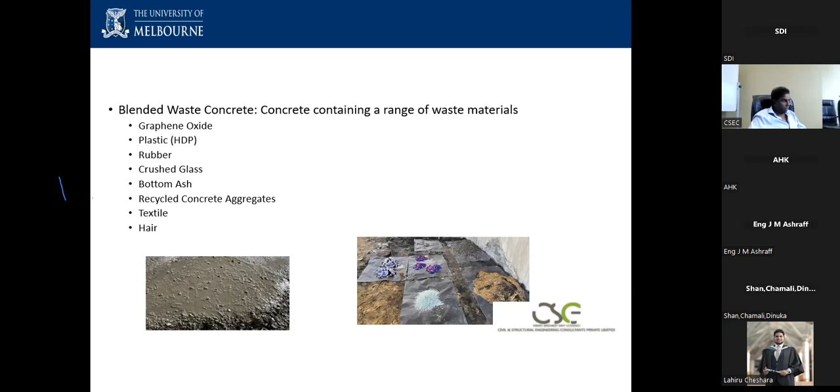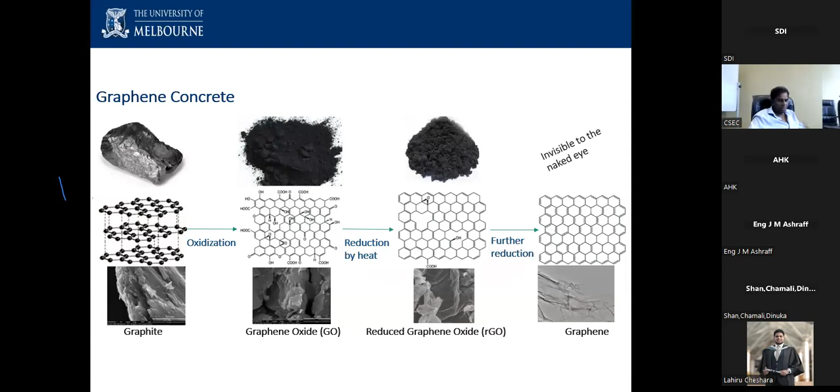We put in graphene oxide, because the waste materials sometimes reduce the concrete strength a bit, so graphene oxide bumps up the strength towards the normal range. The cube tests we did for this slab are very good, so this slab is very safe. It's one of the first in the world, in this building. Then we put graphene into the column at the top floor of this building. I will skip the graphene slide I already mentioned. Read about graphene as well; there are some good properties coming up. And the recycled materials: think about the construction waste. Rather than just dumping it somewhere, think about reusing the materials.

Right? These days, we don't even want to throw anything, right? Back in the days when I was growing up, if you had some problem with the table, we would just say, put it outside, let someone just go and dump it. But now what we do is try to use the materials to our advantage.

Think about all the materials: all the asphalt on the roads can be recycled now, and is being recycled. We talked about the other materials. Aggregates, we already talked about recycled concrete aggregates. And we are using glass, we're trying to use paper, we try to use textiles, tires are another application. These are some positive properties to make it low carbon, right? And glass we talked about.

Paper also we can use, though it's not easy to use paper. In the first project we had, I don't think anyone had published this work, so we were one of the first in the world to use paper. If you have any questions, happy to answer.

Textiles, we can put the textiles in. Textiles, as fibers, will improve the tensile strength of the concrete. However, textiles absorb water, so you need to adjust the water content. With paper and textiles both, you need to adjust the water content because there's water absorption from these materials. So because of that, you need to do your mix designs accordingly. So this is the kind of knowledge we will generate in the future.

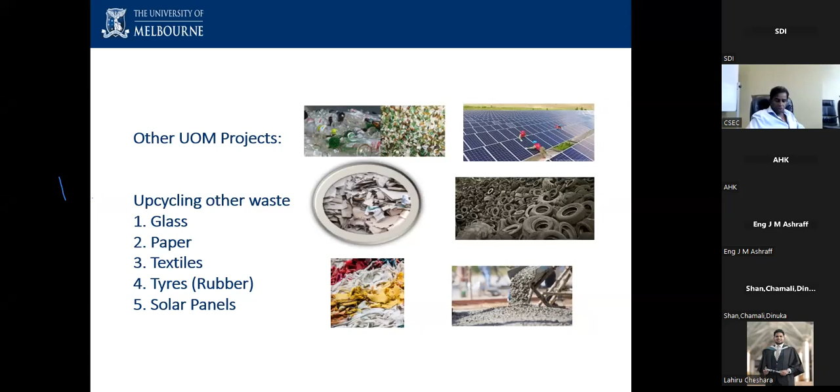I'm the one who gave the name to the industry person. We've got one of the plants coming up, again one of the first in the world. In Melbourne, we came up with converting the solar glass from the process of solar panels, because glass is the main component of solar panels, right? So why not use it in concrete? And there are other issues like ASR; we talked about how to use fly ashes. So we are finishing off solarcrete.

Now there's an article we wrote, Asif and Chatsika, that appeared recently in the Daily News, on hemp, to show that industrial hemp is not the marijuana people talk about, right? You know, marijuana is not allowed to be used. Industrial hemp is totally different. So I'm working with the farmers, trying to use the hemp.

Hemp absorbs carbon dioxide, and hemp can be used for what is called hempcrete, in concretes and other materials. Hemp fibers can be used. So some of the newer things will have natural materials, biomaterials, all that in concrete as well.

So on that note, to summarize, that's why I was touching on the basics. You need to understand the basics first to work on low carbon concretes, right? You have to understand the basics of cement production, how this carbon dioxide is produced. So we need to attack on all those fronts. I told you captured carbon can be used to strengthen recycled concrete aggregates, or for carbon curing, so those solutions can be found.